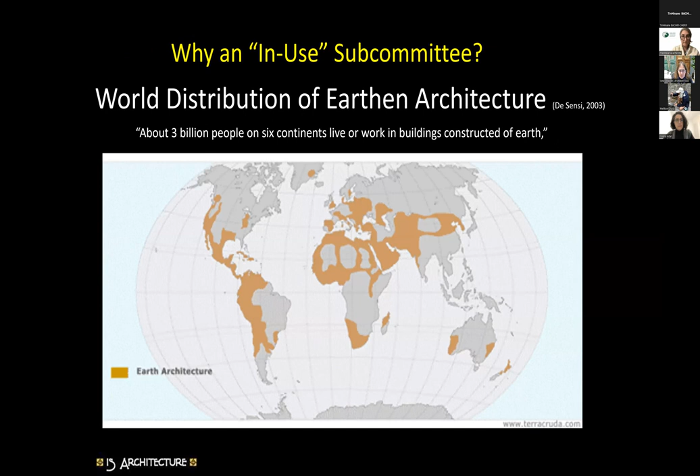Why an in-use subcommittee? Because as shown on this map, earthen architecture is used all over the world. Around 30% of the world's population live in earth-made construction, and approximately 50% of the population in developing countries live in earthen construction, representing millions of earthen buildings.

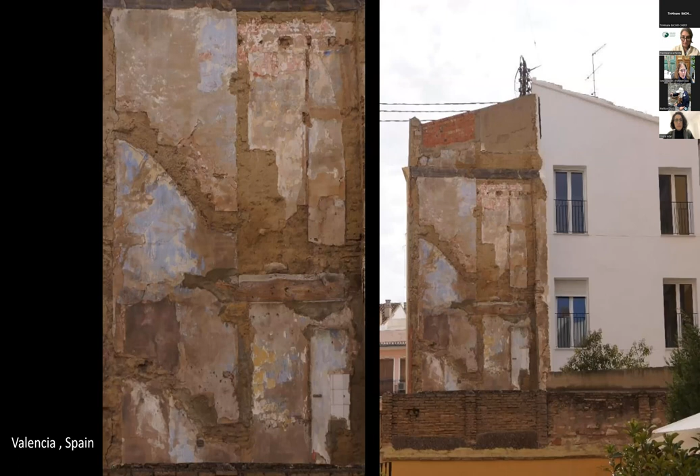Earthen architecture is everywhere, and often we don't even know we're walking past it. Here's an example from Valencia, Spain. We really don't see it until there's a little slice of it taken away and opened up, and there's the earthen building.

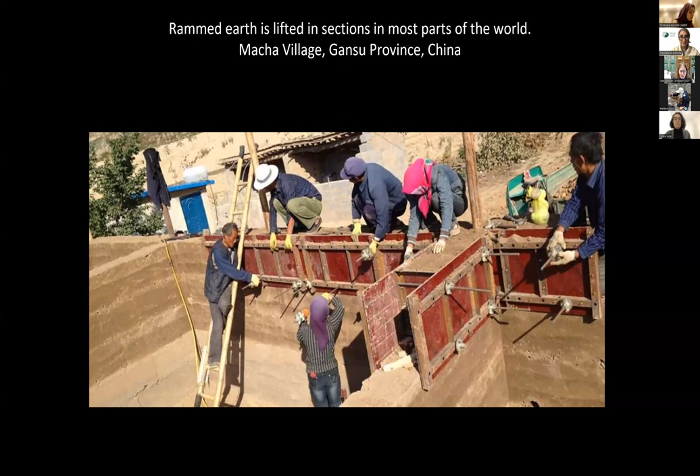Even though a large percentage of the world's population lives and works in earthen structures, there's been identified a significant loss of local knowledge and craftsmanship. New generations are losing the knowledge and craft of working with earth to form shelter.

There is a false stigma that earthen architecture is not as hygienic, is prone to spreading disease, and is not as good as other non-earthen forms of architecture such as construction with steel, concrete, and wood. This stigma has driven a loss in modern demand for this form of construction and thereby a loss of local knowledge. This loss equally affects both our heritage earthen structures and the creation of modern earthen structures. While our subcommittee is concerned with heritage earthen structures, it is the loss of demand for modern structures that is affecting local craftsmen from having a next generation to pass their craft and trade to.

The drive in the global south to modernize and copy the global north's construction methods of concrete, steel, and wood are easily reconfigured with concrete masonry units, called CMUs or cinder blocks. These are easily substituted in the global south because their use is similar to masonry construction methods for adobe blocks. Although this modernizing process is repeated over and over in villages and towns around the world, we're losing our collective knowledge on how to make adobe blocks and build with earthen construction, because pre-made, ready-to-assemble concrete masonry units are fulfilling a perceived need.

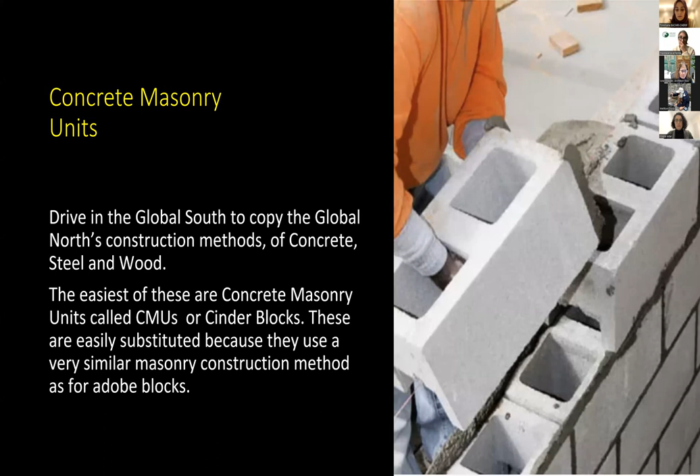However, CMU has much less mass than a rammed earth or adobe home. You can see for yourself the hollow cores in the block, which make these walls have far less mass. Therefore, CMU walls heat up quickly on a hot day and then radiate the heat to the interior of the building. This daytime radiant heat, coupled with a thin metal roof that also collects and transfers heat into the building, creates a building that's incredibly hot and then needs air conditioning to cool off.

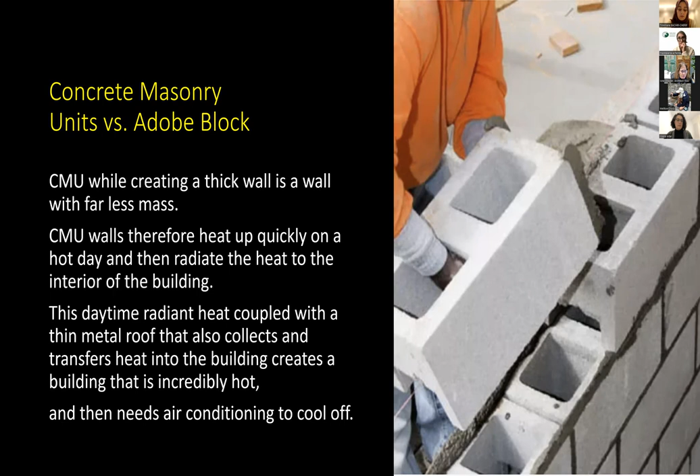Here's an example in the Eastern Cape in South Africa, where I'm told by researchers there, families will save up for a week and take a little extra money to buy 1 or 2 blocks, a dozen blocks, lay those up, and then wait till the next week to build the next blocks. But they're getting an inferior product. In Africa, it's a prevalent problem.

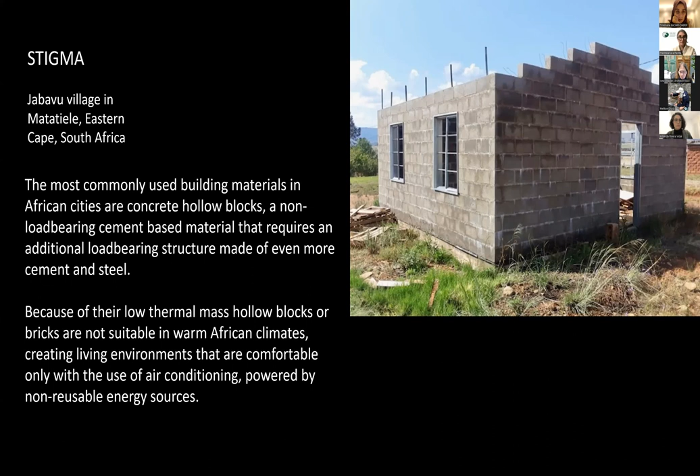These non-load-bearing cement-based materials require additional load-bearing structure made of even more cement and steel. Because of their low thermal mass, hollow blocks or bricks are not suitable in warm African climates, creating living environments that are comfortable only with the use of air conditioning, again powered by non-renewable sources. This all leads to increased carbon usage, when historically there already existed construction solutions to cooling.

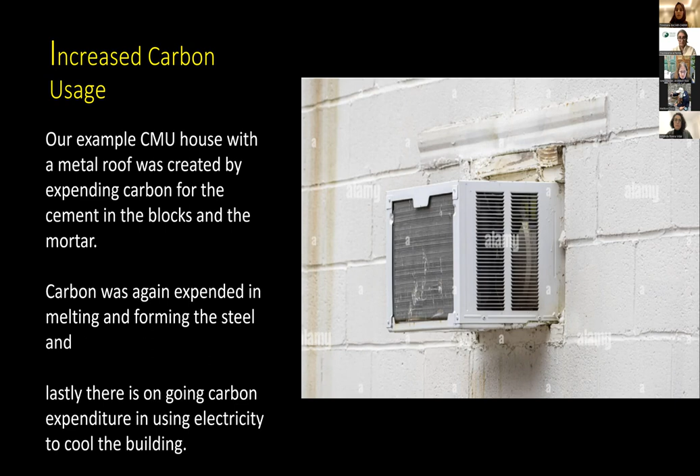We need to better educate those living in heritage earthen structures on the role their homes and buildings are playing in saving on the emission of carbon, and emphasize that their homes should be the role model for new construction. An earthen structure has such a large mass in 18-inch to 24-inch thick walls that they protect the interior from the heat of the day and do not start radiating heat to the interior till the evening, when it can be appreciated. Coupling the cooling effect of the walls with a wood roof, or even better, an earthen roof, can additionally protect occupants from the heat of the day.

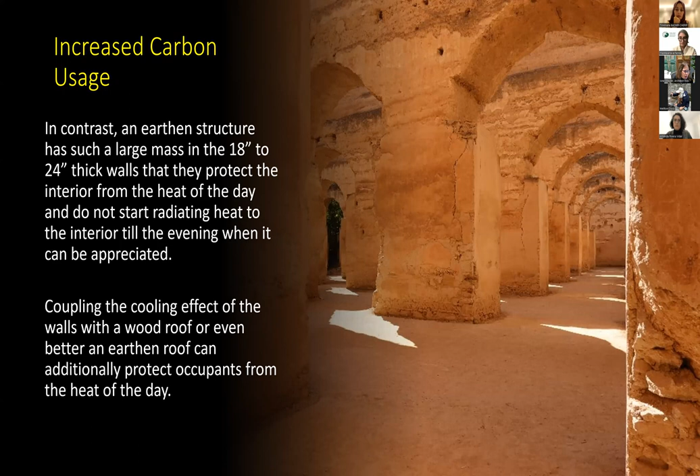We need to teach those living in heritage earthen structures why their home is actually better at maintaining a healthy humidity level that is optimal for humans.

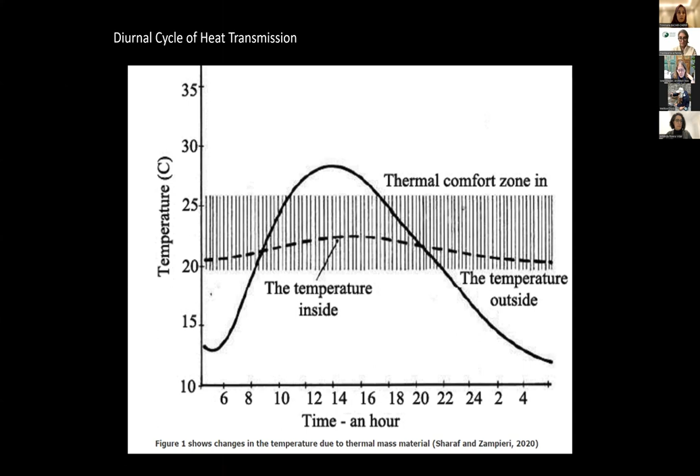Teaching the benefits of earthen heritage architecture is even more difficult when these stigmas are reinforced by governments, like in Rwanda, that first banned the use of earthen bricks in 2006. Then, in an abrupt shift, the Rwandan government reversed themselves and now saw earthen construction as a way to provide much needed housing. They're realizing that they can overcome the failures of the housing type in the past with stricter new adobe brick construction standards, and so they have just enacted those.

By altering the perception, the next generation and the next after that will learn the crafts of working in earthen architecture. This creates a double benefit of training craftsmen who can then maintain heritage earthen architecture and training for new low carbon means of housing the burgeoning population.

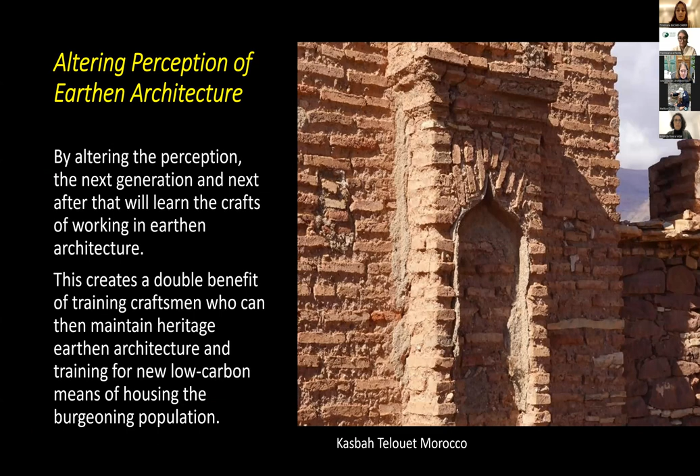We must move beyond reenactments like this one of earthen building and get to actually implementing repair methods.

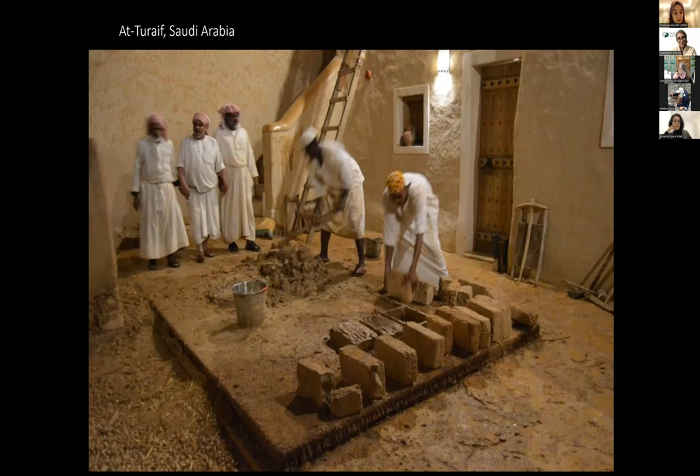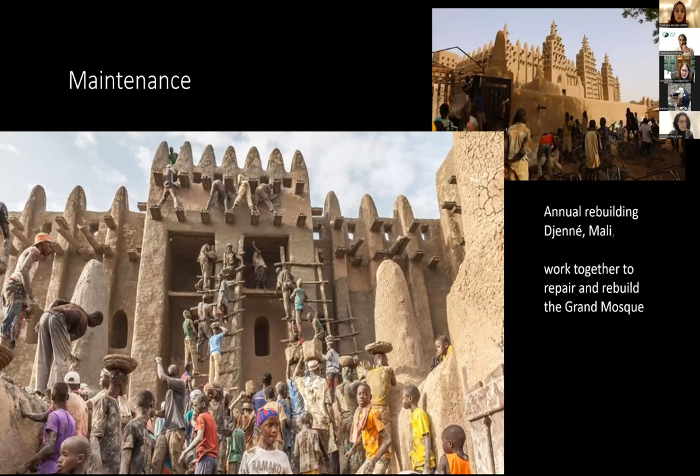One way to pass on the knowledge of earthen buildings is by celebrating the event, like the annual rebuilding of the Grand Mosque in Djenné, Mali, or in Taos, New Mexico, where there's another successful example. Annually, the next generation is taught the art of repair on the Taos Pueblo in New Mexico.

More images of the annual repair in Taos, and TinHinane will be expanding next on the topic of documentation as a tool of preserving earthen know-how.

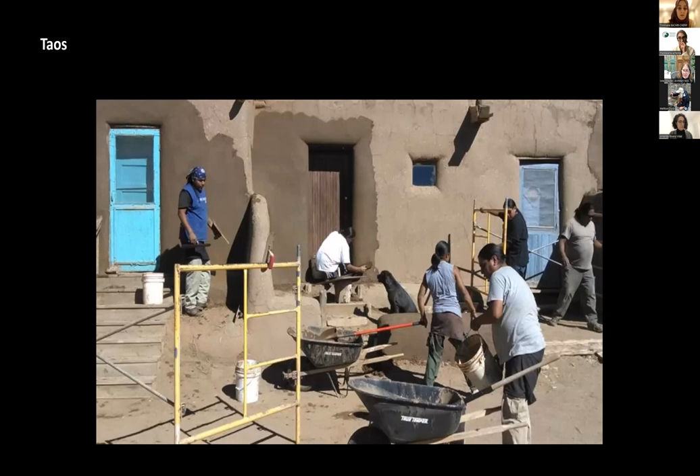Others in Lagos, Nigeria, are looking at a way of passing on the knowledge, as Professor Johnson is creating competitions to get students involved.

So that's the background of what we're seeing with in-use earthen architecture. And now for the work of the committee: what we're doing is to aid the new generation of earthen architecture craftsmen.

The committee is taking the glossary of earthen materials deterioration patterns created by another subcommittee of ISCEAH, and we're overlaying and providing evidence-based field techniques to repair these forms of deterioration while honoring the heritage of the building. The goal is to compile repair techniques from multiple continents. Repair techniques will also address the primary earthen construction types, including adobe, rammed earth, and hand-formed.

This is an image of the table of contents of the glossary, and the repair technique that we will be looking at today is the one pointed to by the arrow: basal erosion and coving.

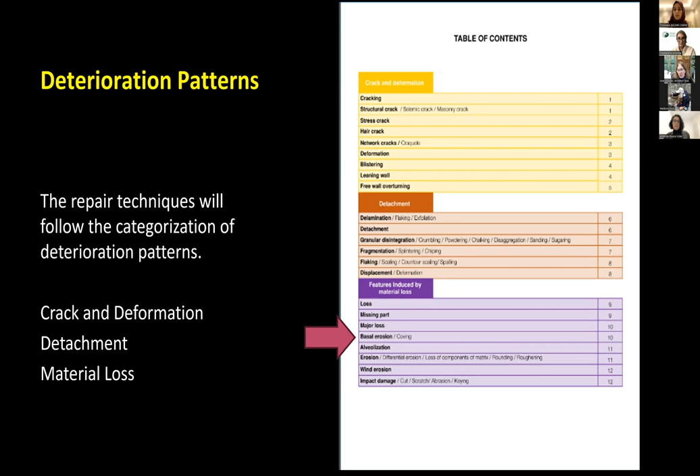Our overlay for this section will include the structural repair of the bases of the walls, for which the removal of a significant portion of the walls has compromised the structural integrity. This may include additional foundation stabilization if required. It includes the extensive voids caused by mechanical erosion and the effects of rising damp. The intent of the construction is only for the purpose of providing structural integrity to the lower walls. We're not trying to rebuild the entire wall. Portions of missing architectural elements or features shall not be constructed except for that purpose, which is to repair.

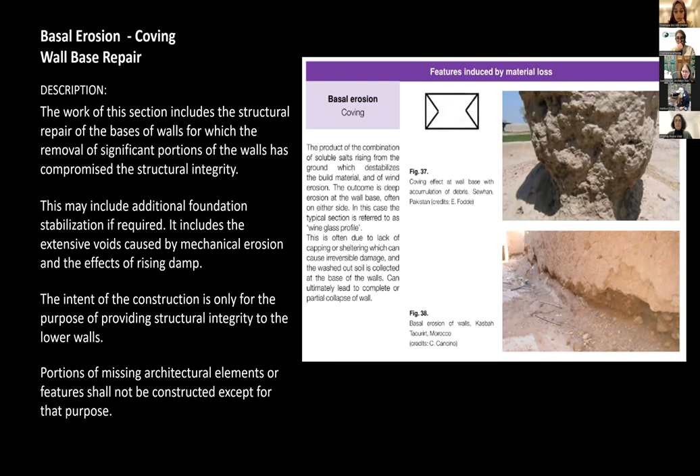I'll have some other images of basal repair in a few more slides. In any case, the process is the same as for basal erosion.

You remove loose mud bricks and friable materials from the area of repair, cut out existing mud bricks to create a solid base for the repair, cutting them in a stepped pattern to integrate new bricks in a toothed pattern. Determine the specific extent of the construction prior to beginning repair, the amount of original material to be removed, and the specific depth and extent of the repair.

The specific details of construction shall be determined after loose materials have been removed. Place horizontal and vertical string lines in the section of new mud brick masonry after removal of any damaged existing mud bricks, to ensure that the repair is consistent with the form and mass of the existing masonry.

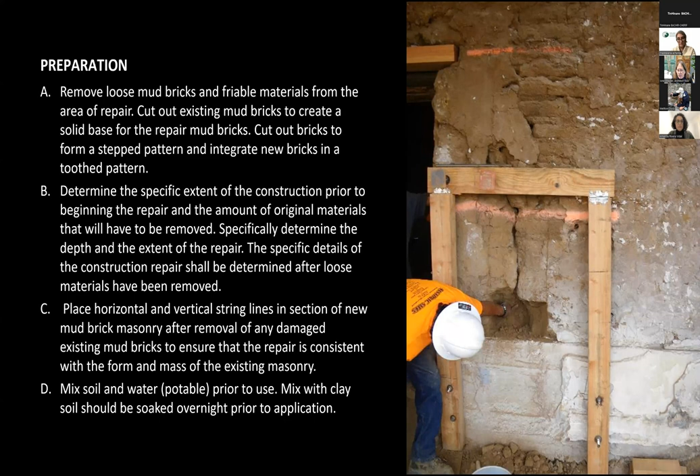If you look deep in the hole where these gentlemen are working, you can see that they are keying in new material to existing by setting new bricks in a toothed pattern, keyed into the original mud brick masonry, packing new mud bricks and mortar to the maximum extent possible, and replicating the coursing pattern of the existing exposed surface, including the thickness of the mortar bed joints.

Construct the new mud brick masonry in complete horizontal courses where possible. Set new bricks with head joint mortar as well as bed mortar. New mud brick repair shall not appear as new construction, but shall replicate the general character of the surrounding wall surfaces.

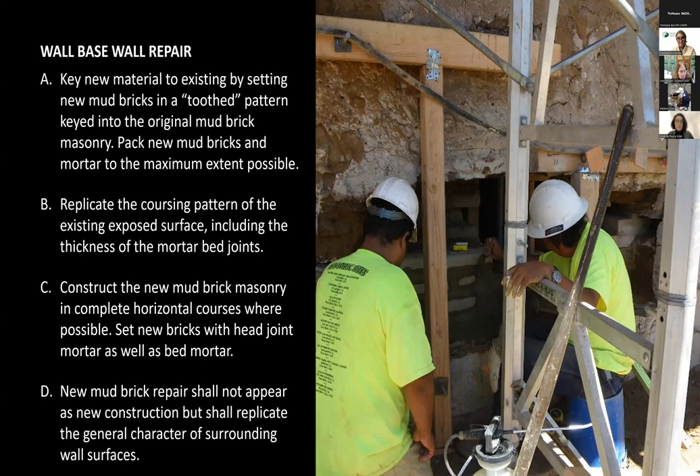Here it is in progress as they're building from the back to the front of the opened hole. Here are some diagrams explaining doing this at the base.

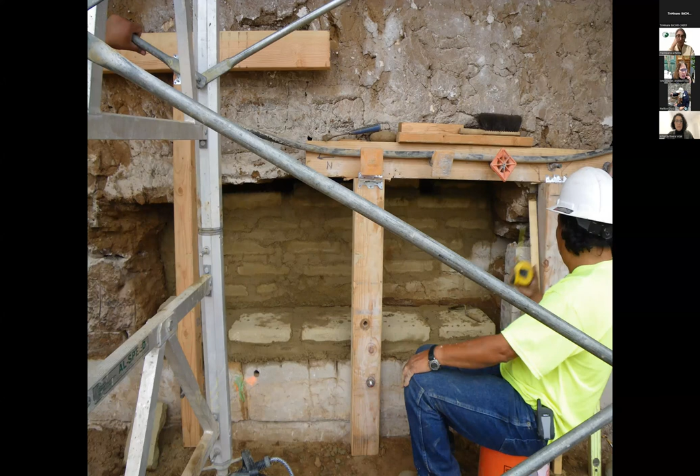First, you clean out the hole, and as you're cleaning out the degraded adobe, you need to come in and shore with blocks of wood and shims to hold up the upper course.

As you insert a new course of block, you shorten the shim and re-support. You do this step by step, keying in from the back to the front, as well as keying in side to side.

So here you have your keys that should be open side to side. That's an existing brick, with that being the new brick. You keep layering up, and then you get to the final area, where you have to push in the last of the mortar.

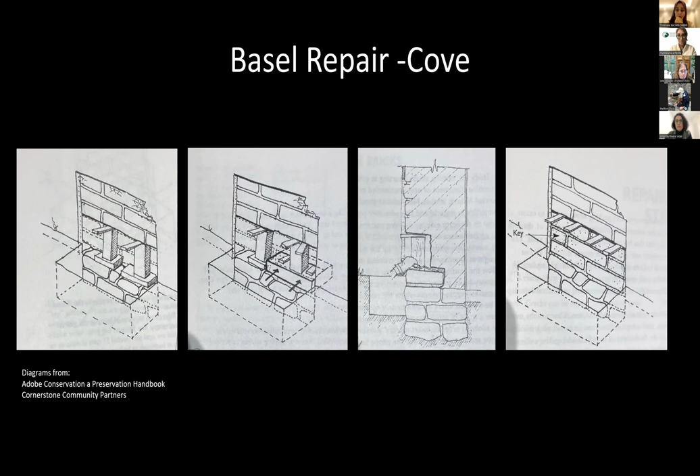Here are some other images. The mortar should be thoroughly wet and in a plastic state, but as dry as possible. The specific moisture content of the mortar will vary depending on the specific use.

If the basal erosion void is wider than one withe of mud bricks, set the interior courses and allow to cure for a minimum of 72 hours before continuing with the exterior withe. So here, with a deep void, you would do the inner bricks first, wait 72 hours, and then do the outer course.

Protect the repairs from rapid drying by misting, shading, and protecting from dry winds. Usually this is done by putting a damp canvas cloth or burlap over the face.

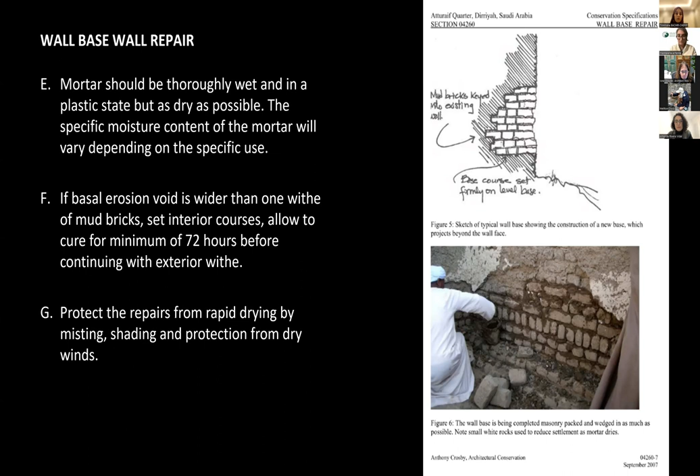All of that information is what our committee is trying to boil down into single-page images that can be easily printed and taken out to the field for work. These cover the deterioration pattern, basal erosion, the material, adobe, the work, wall base repair, and a description of that, along with the materials needed, the preparation, the repair we just went through, and helpful images guiding that repair.

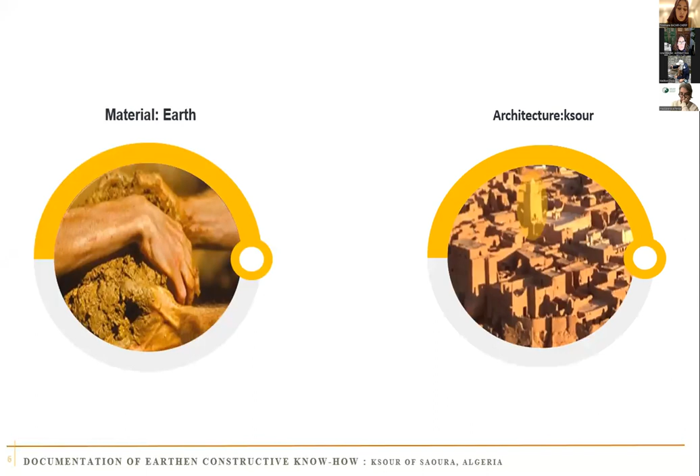So based on this first assessment, my research aims to make the link between earth as material and the ksour as architecture by identifying and documenting the constructive know-how which led to the creation of this fabulous architecture. On the one hand, from these sources it would be possible to identify, recognize, and understand the traditional building skill, and also to constitute a platform for fundamental knowledge to better preserve and enhance this vernacular earthen architecture.

And on the other hand, to provide a useful reference or support for the construction of new earthen architecture better adapted to the context of the region.

When I went to the site to start my work on documenting the constructive technique, I realized that even before documenting this, there was no prior documentation on both urban and architectural scale. Not only no support to start with my research, but also, maybe next year, there will be no traces of this earthen architectural heritage.

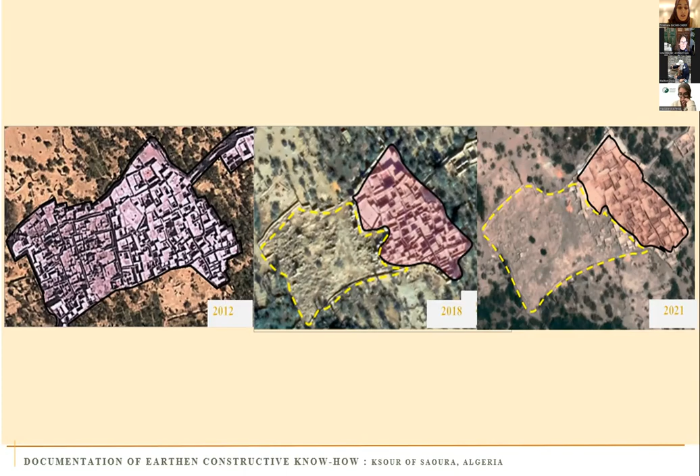I chose the second option because for me research isn't about time or effort, but about impact, or at least adding something others can use to start their research. So using graphics, photographic representation, and above all satellite images, as well as a direct field survey, I studied and analyzed the six qusur and finally produced a modest documentation.

about the urban fabric, the parcel, the streets, the public spaces, and also about the organization, the social organization and life inside the qasr, to finish with a complete documentation for each qasr on the urban scale and also the social life.

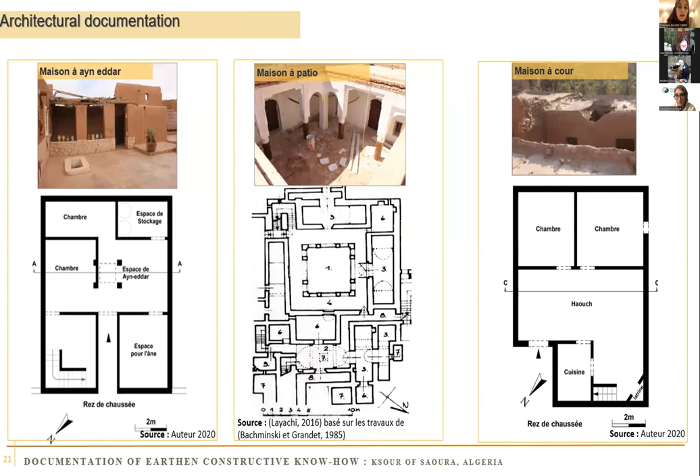Then I analyzed the main residential buildings to find the different types, the different typology of the houses. Then I did the same for the mosque.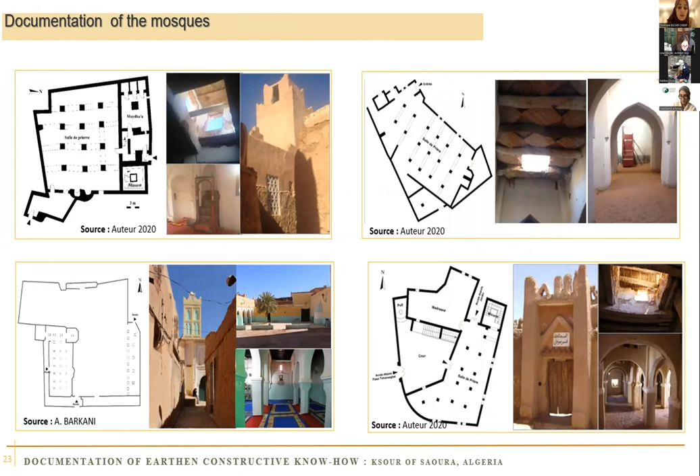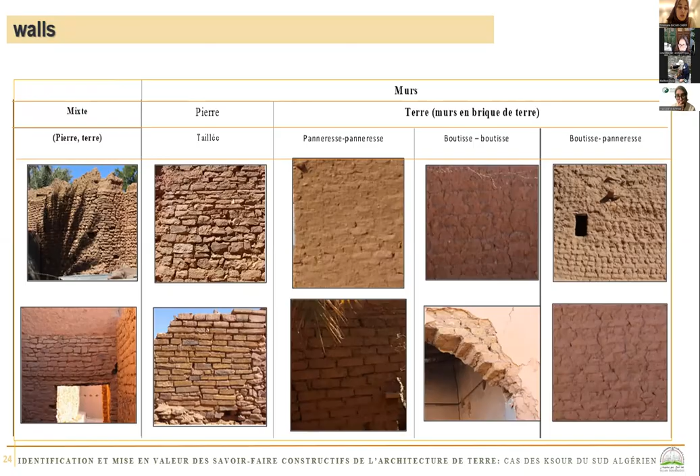After that, I returned to documenting the various constructive elements still observable in each qasr. I started listing them one by one in a table. As we can see here, walls have been classified according to their composition and construction material: mud brick walls, stone walls, or mixed walls, also highlighting the dimension of the bricks or mud bricks used in construction.

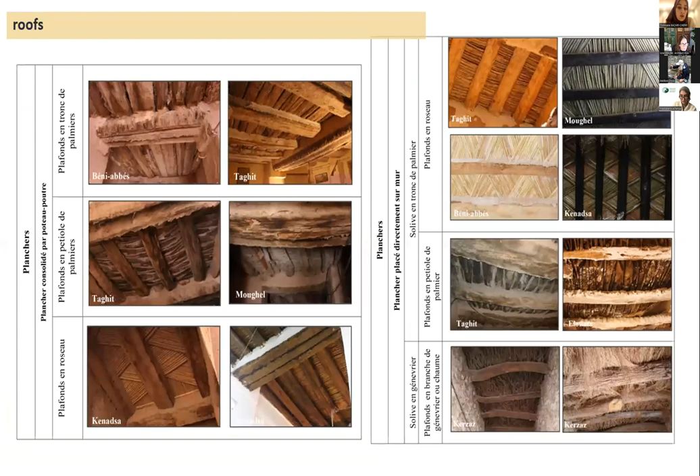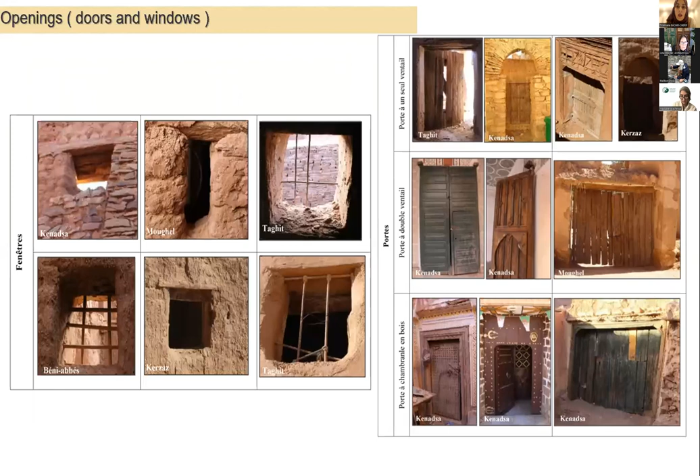The same approach was applied to all the elements: the roof, the beams and the columns, and also the openings, the windows and doors, and the stairs. So first I classified all of this by type, and then the arch, and some decorative elements we identified at the sites.

Our objective was not only to document the constructive elements, but also to understand the process of construction and how the masons used to work to arrive at this final result. In order to understand this know-how in its two dimensions, material and immaterial, our first step was to find the masons in each qasr, or people from the local community who could explain and show us the traditional building process.

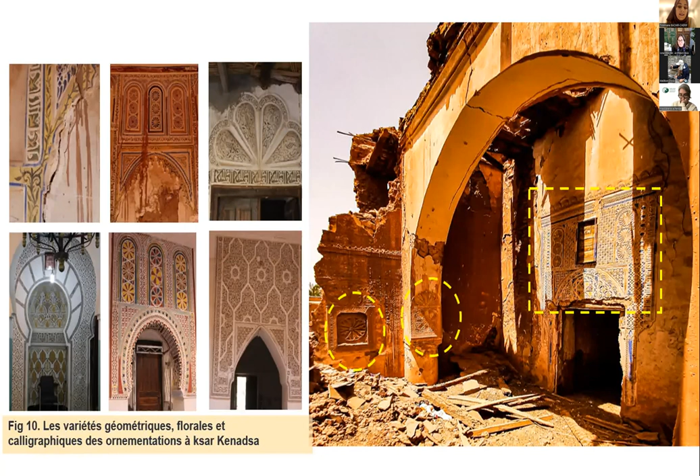But unfortunately, once I started to search for those masons, I didn't find any. Maybe I found one, but he was not cooperative. So I opted for another approach to complete my investigation.

TinHinane, you've gone mute. You accidentally pressed mute. I can see your mute. Oh, there it is, it's off now. Can you hear me? And you can hear me now? Yes, now we can hear you.

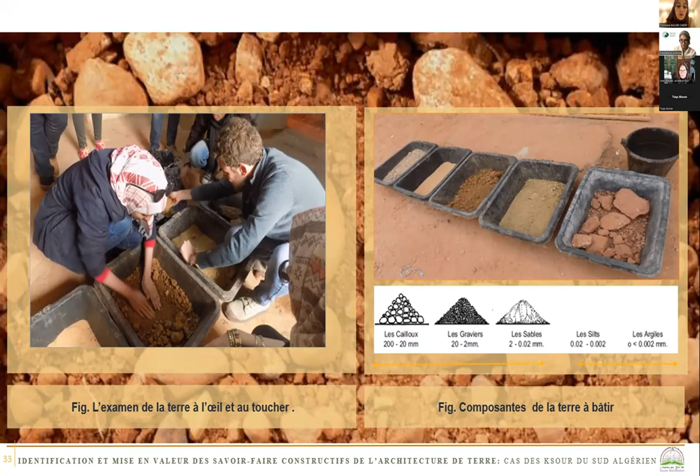Before that, I learned how to choose the right type of earth for construction using some basic tests on site. Then I proceeded to make the mud, then the mud bricks.

By putting my hands in the dirt, but in a joyful and lovely way, because you can never understand this technique deeply if you don't go and work. You can't just do it by observation. You can write or document something, but the feeling comes from putting your hand there and trying, because we started working from sunrise to sunset, and it was very hard work.

The water was very cold because it was December, and I was like, oh my God, how can they do this? How do they manage? So I wanted to try it, and I made some bricks, of course.

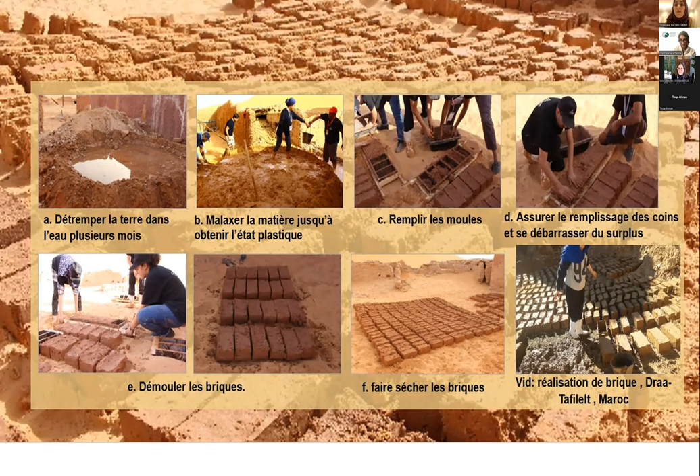Then I worked with them also to understand the process of making the walls.

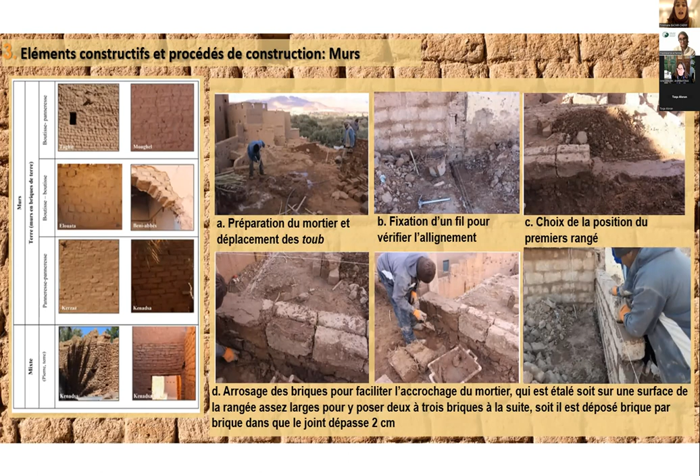It was easy to see it from far, but working on that isn't like making pieces of a puzzle, because the hard work is managing the difficulties you find on the site. You need to find an immediate solution, and this is what those masons learn by experience. They just try to find solutions in their own way. They don't have rules to follow.

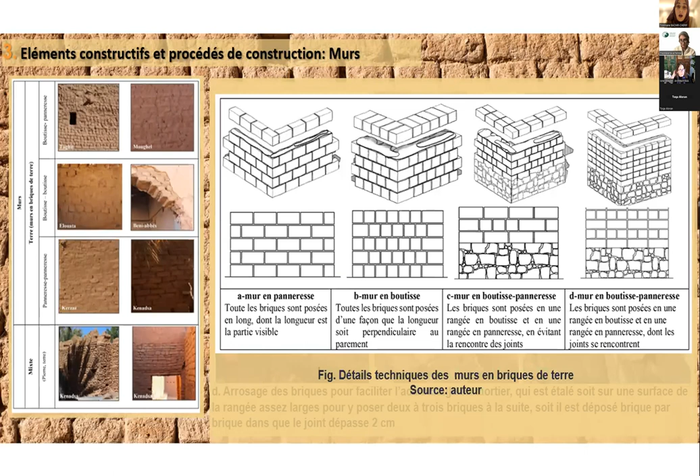After this work on site, it was necessary to reproduce this result using technical drawing in order to formalize the construction process, explaining the different possibilities of laying earth bricks, for example, that we had identified on the site. We did this for most of the elements we had identified in our region.

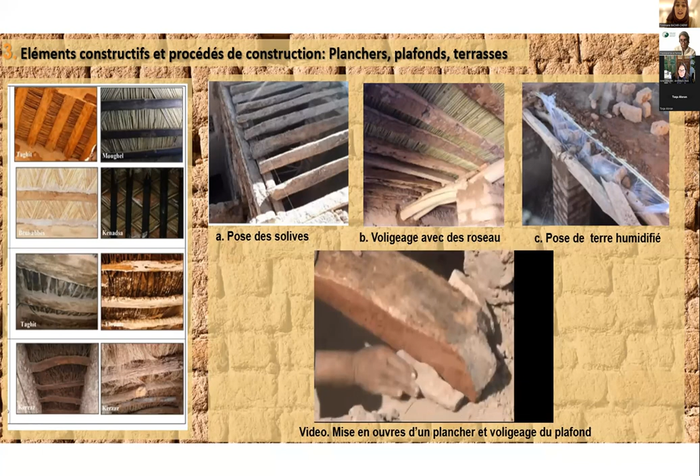Also for the roof. When we looked at it, it was like a piece of art. But to arrive at this result, you should be very focused. You should choose the right pieces in the right place, because if you don't do this, at the end you won't have this beautiful art.

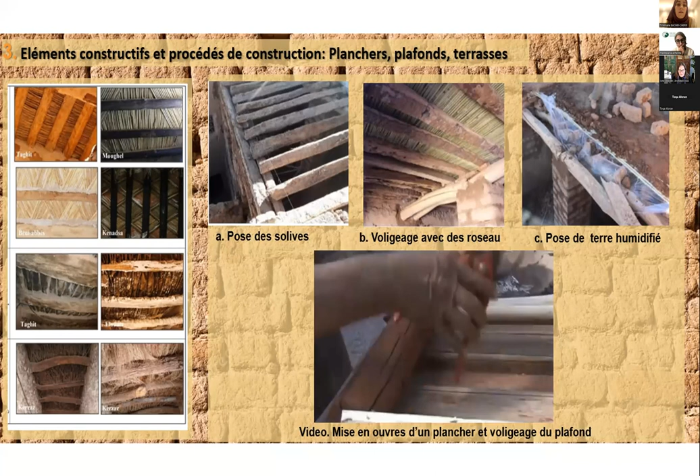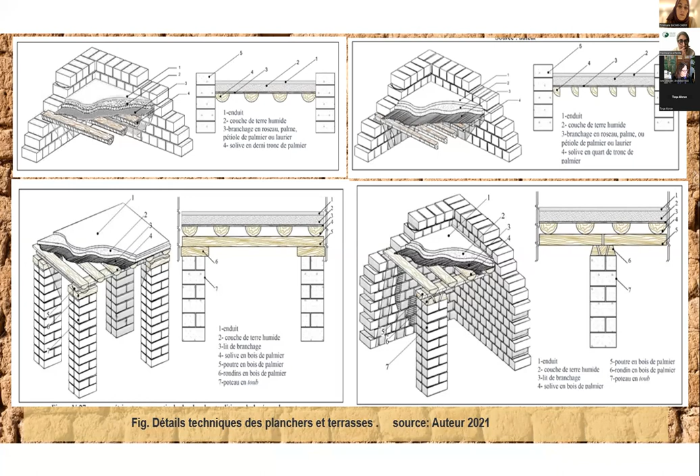As I said, all these documents have been redrawn and rendered into technical drawing. I did the same approach for the stairs, the beams and columns, and also for the arch. As a result, I had full documentation of the earthen constructive know-how of Ksur in my region, Saoura, with technical drawings and text explaining the process and how the masons used to work on site, and how they used to fill. Now we are working with other experts to turn this research project into a manual or guideline.

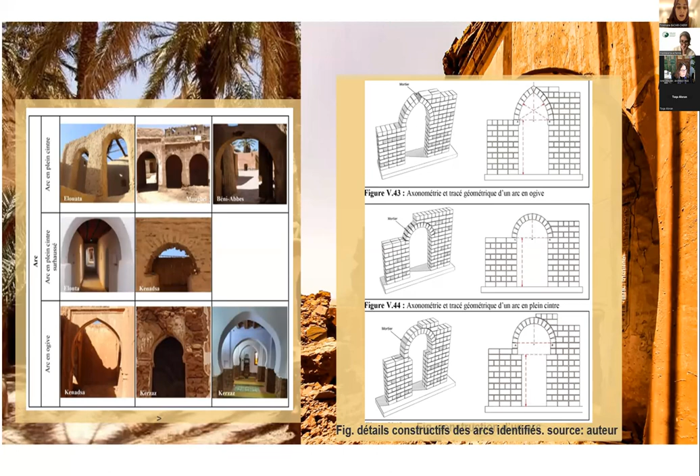I dedicate this work to Mohsen, one of the masons I worked with in Algeria, who passed away this year. At the same time, a great knowledge has been lost with him.

Finally, I'd like to thank all those masons. They were very, very patient with me, and they even accepted a woman to work with them in the field. That's rare, especially with Algerian masons.

There's still a long way ahead in promoting earthen architecture, but let's stay positive and especially work towards it. Thank you for your attention.

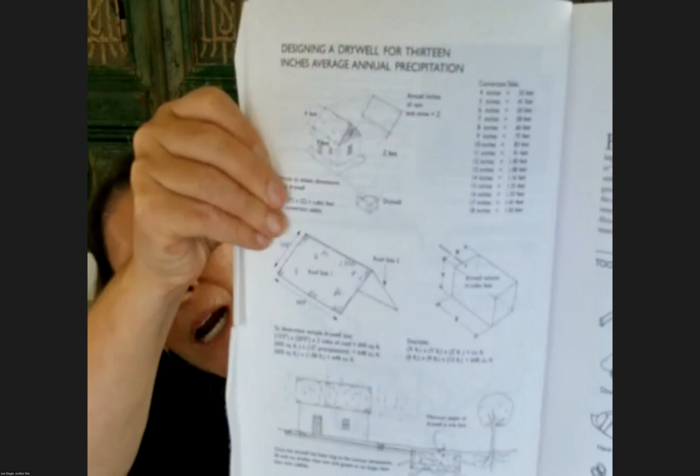It is all in English, to show what you need and how to work. Mine has my pencil scribbles all over it, as I've altered it a little bit here and there. But I think this is one of the best books out there for true hands-on how to do it, with more information than many give you.

But you're right, and what you're looking for is what we're trying to put together through the committee. It's a little daunting because from what I know to be good practices here, some of it applies in other parts of the world, and some of it really doesn't. I don't want to give false information out there from the committee, so it really needs to get fine-tuned to make sure it works in all local areas, or as many local knowledge bases as possible.